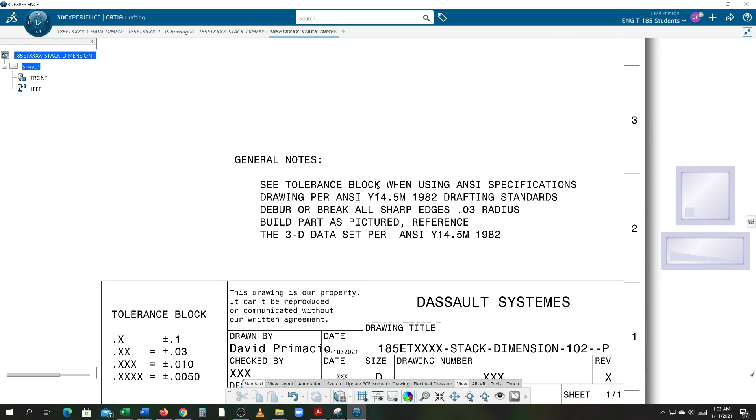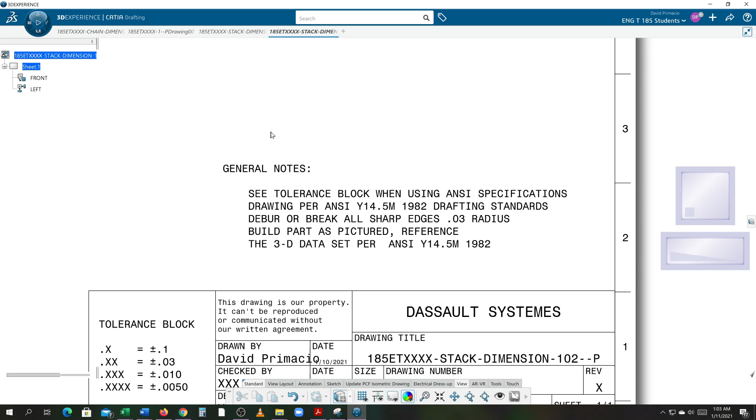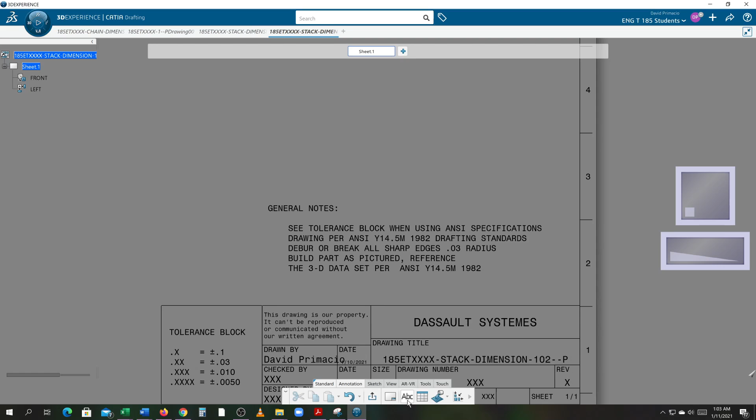I'm going to copy this general note in. And we've got to go back to the edit background. Go into annotation and select the text. Click a location and then paste that in there.

Whoa. That's weird. Let me see. Why did it do that? Now, for some reason, it gives me another line. I'll try and get rid of that line. Click. Dang it.

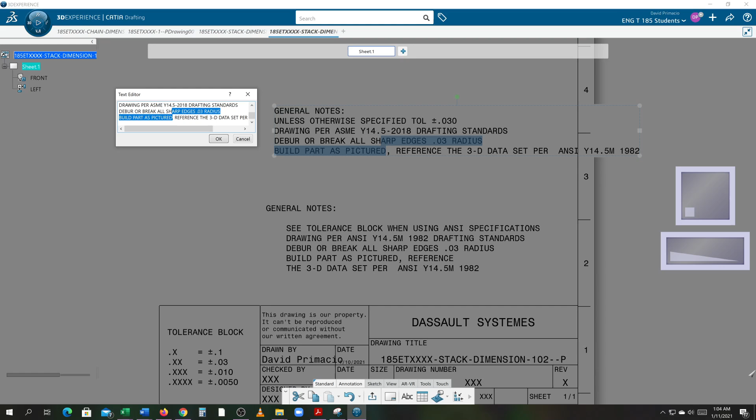I'm going to try. I'll move this box up because, again, I see it better here. I'm going to click on where it says D and hit Shift Enter. Select OK. Alright, so now I've got my general notes here.

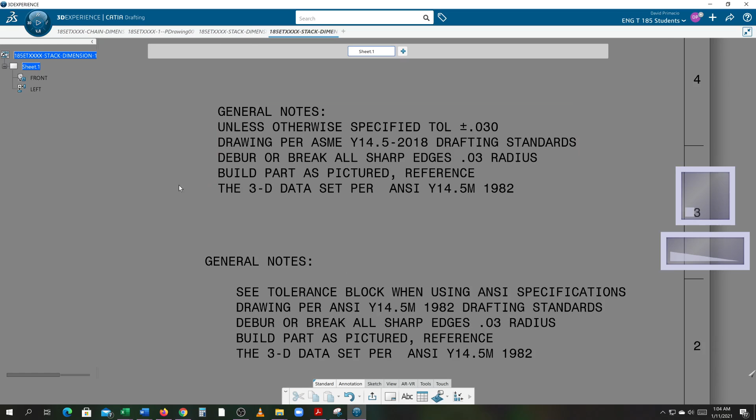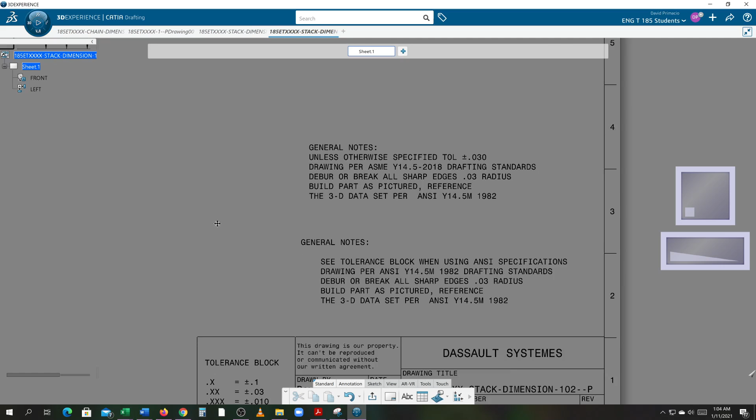You'll notice that, unless otherwise specified, tolerance is plus or minus .030. Well, with a lot, but not all, ASME drawings, they went to 4-place dimensioning. So, if I zoom over here, and we go back to the sheet background, and I click on these,

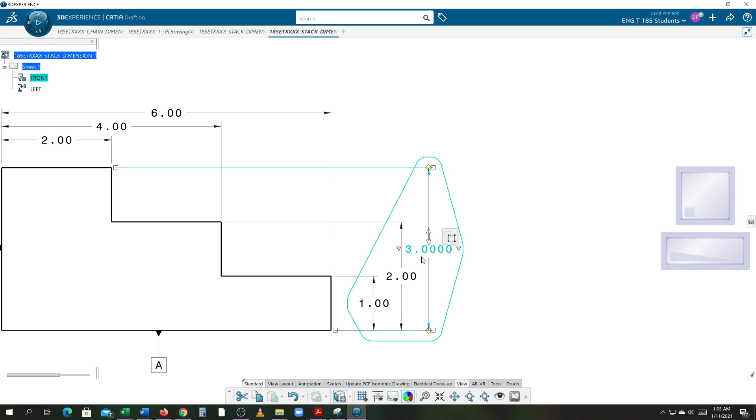click on this and let's see if I can do this. Let's highlight all of this, right click, properties, and I'm going to change the decimal factor to 4 places on all of those. When I hit apply and say OK,

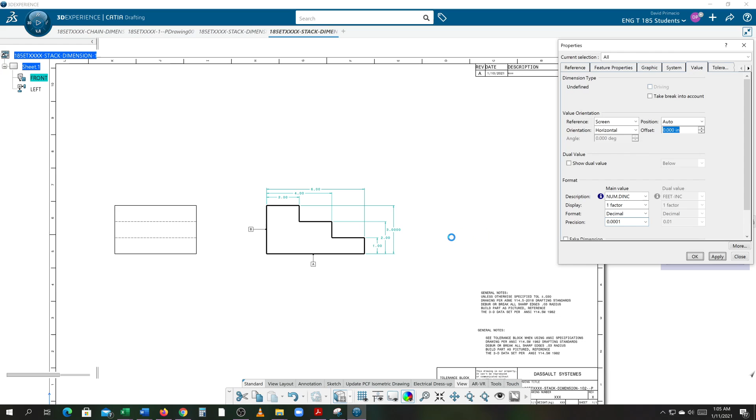one thing is when you're doing 4 places, you'll have to change the spacing of this. Again, you click on this, right click, properties. Because it went to 4 places, it got the system too tight. We'll have to do something like 9/16.

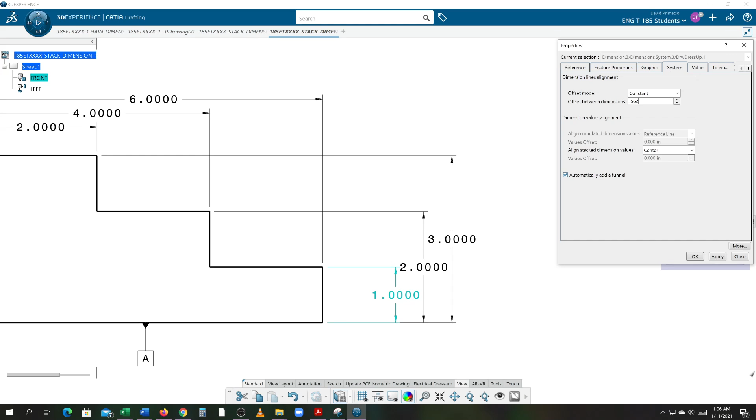No. 9/16, 10/16. We'll try 5/8 via 0.625. I'll do 5 divided by, no, won't do it in this one. 0.5625. Okay, give me a little more spacing here.

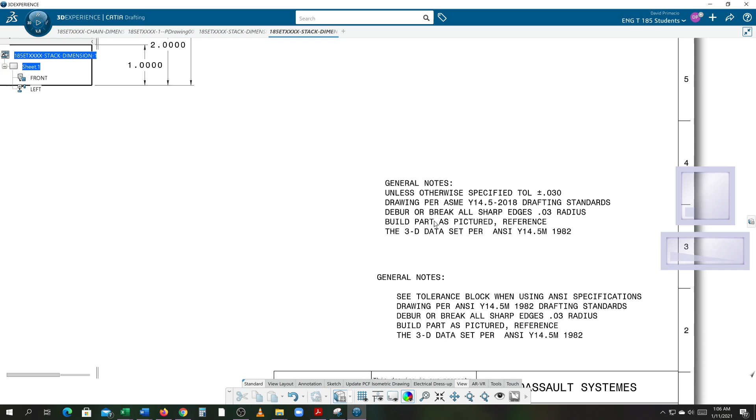So for the ASME specs, you notice it says plus or minus 30 thou. Over here, even though this is 4 places, when you call this off in the general note, we remove this

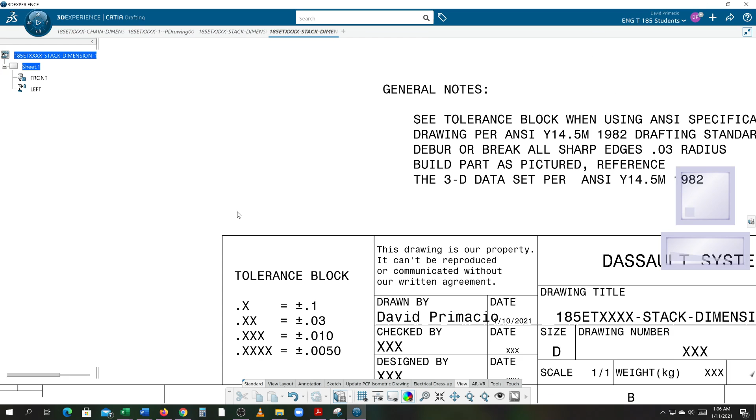from the tolerance block. If this tolerance block isn't removed, that means that all those dimensions have to hold to 0.005, 5 thousandths of an inch. Well, that is going to be one expensive part. So you don't want to do that. So you might wonder, well, why would you go 4 places?

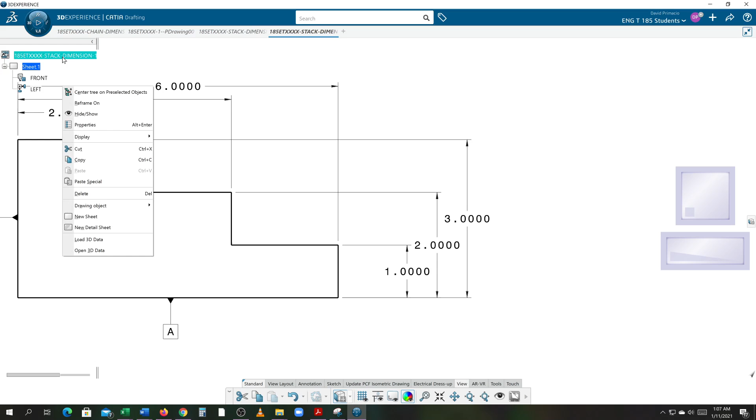Let's go to the sketch. The best way to do that is to right click on this and open the 3D data to make sure I'm going specifically to the correct part that was used for that drawing. I'm going to double click the sketch.

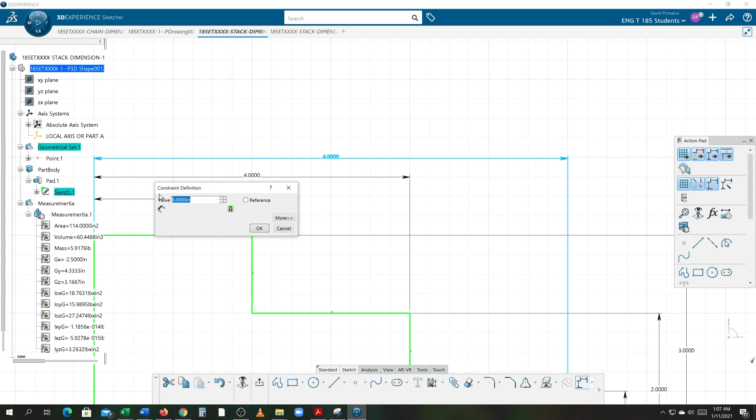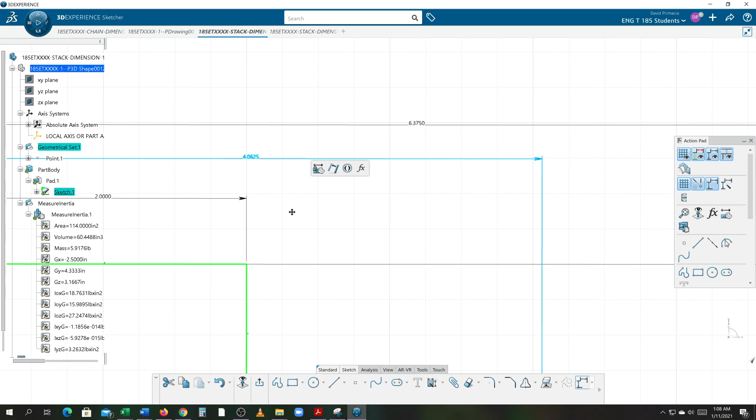Let's make this 6 plus 0.375. Let's make this 4 plus 1/16. Let's make this 2 plus 5/8.

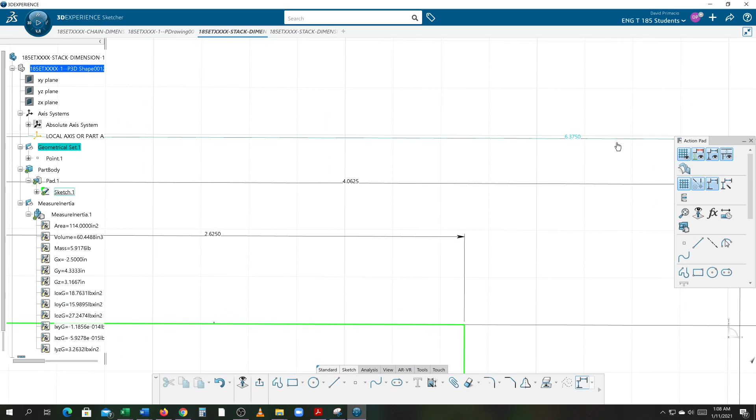Okay, so now that these dimensions are changed, we can exit out. The part is automatically updated to reflect that. Had I had my measurements showing, you would see these measurements. Whoops, measure item. The part has changed accordingly.

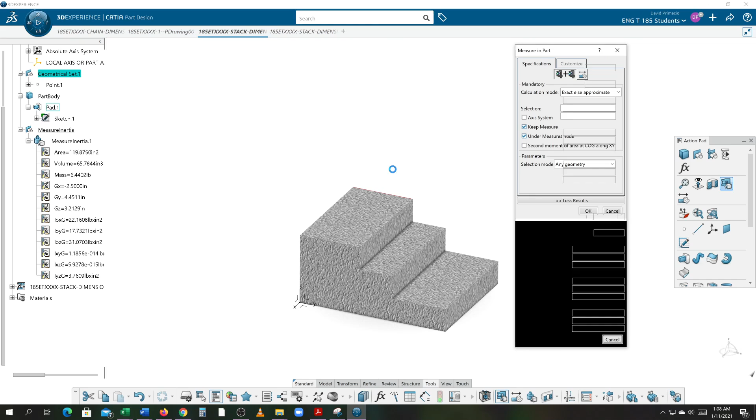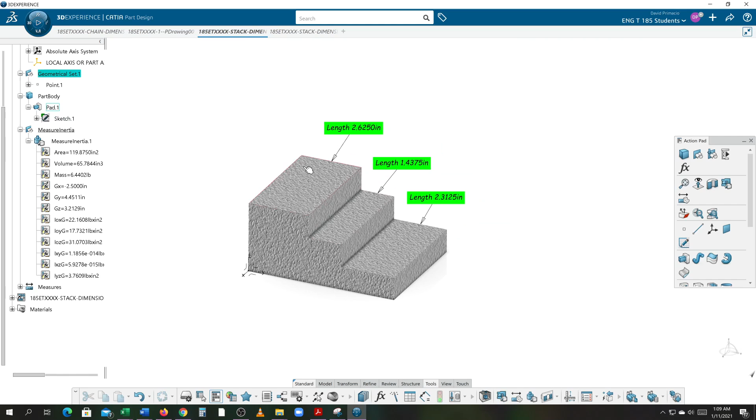Okay, so I'm going to get different lengths for these because of all the adjustments I made. All right, so that automatically was changed in the part. Now when I come to the drawing, I'm going to get an update feature. See all these little yellow marks in the specification tree on the top left corner? All those little yellow circles on there?

That's an update. You can hit this update down here in the feature on the bottom, or you can right click on the top collector and hit the update there in the contextual menu. Either way, you'll get the same results.

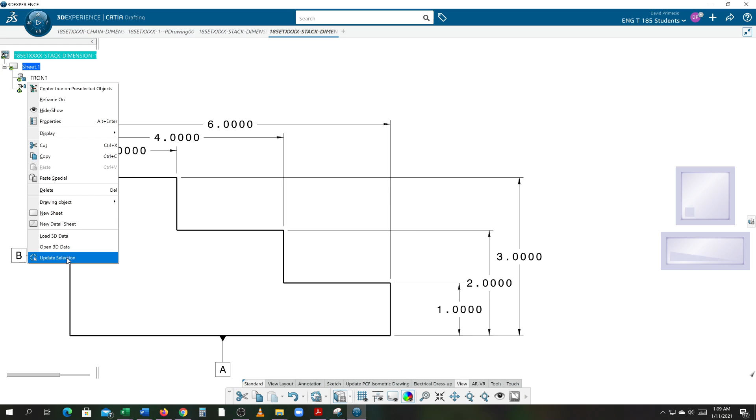When I hit update, you'll notice the dimensions will change to reflect the numbers that have been edited in the part. That's one of the beautiful things about CAD. It does take longer sometimes to make a part, but your ability to modify is so much easier than doing it on paper and pencil.

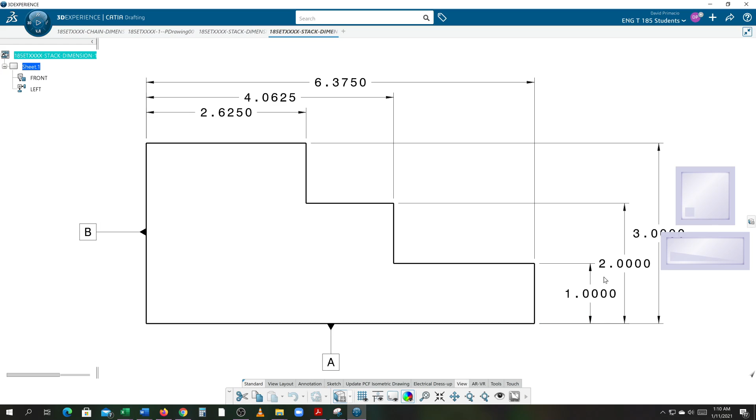All right, now the reason why a lot of the companies switch to going 4-place dimensioning and using this callout here is so there's no controversy on what size I really meant to go with. So if I change these back to 2-place constraints, go to right click and go to properties.

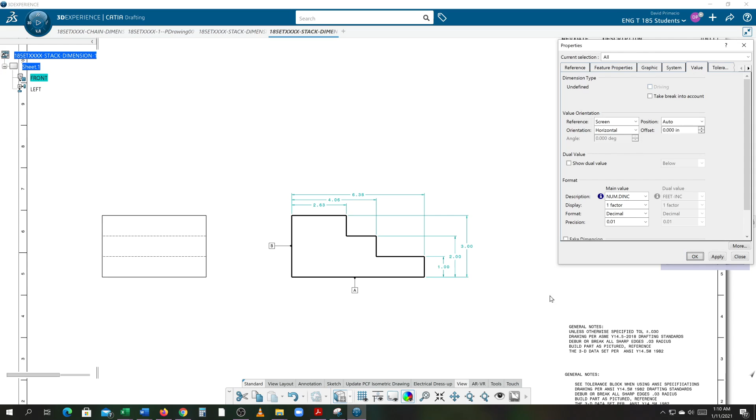If I go to value and put this back to 30 thou and hit apply, or 2-place precision and hit apply and say okay. Yeah, all these 1, 2, 3, that's all fine, but when you get over here, these numbers look odd.

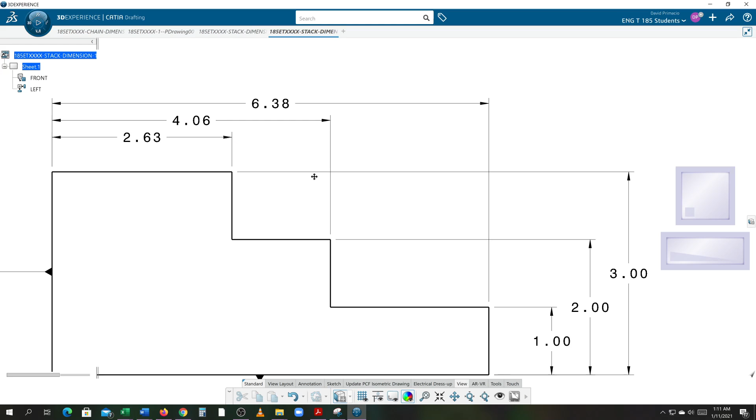And when I see these numbers, because I've been in production so long, I just know that these are 3/8, 1/16, 5/8, okay? Because I know what that would round up to. So this is rounding up, but in production, you want to know that these are actually going to fractions. Well, to remove that question as to whether or not it's 6.38 or is this 6.375, they decided to leave these all 4-place dimensions. So I just hit undo to put it back to 4-place dimensions.

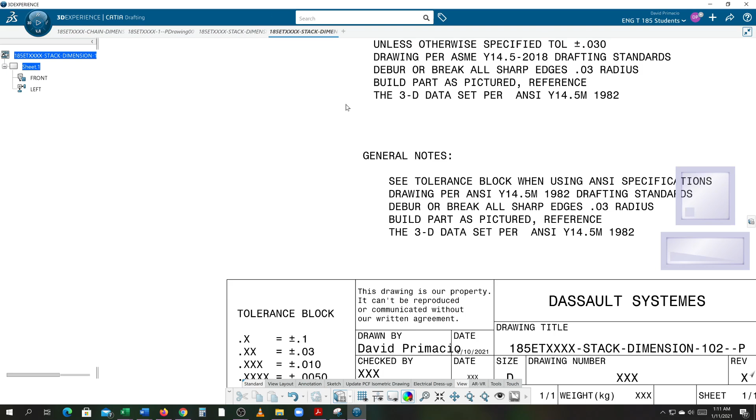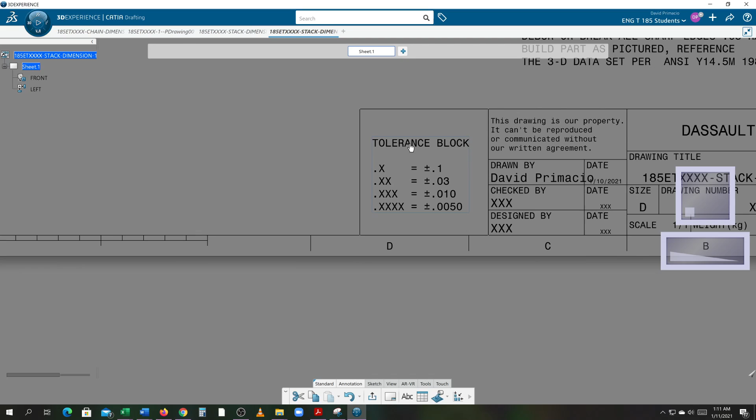This being 4-place dimensions, we don't want that tolerance. What we're saying is, unless otherwise specified, it's all going to be 30 thou tolerance. So we've got to get back into the background. All this hard work I did putting this in, I'm now going to delete it. And I'm just getting those lines, because remember it was a rectangle is what I did. I probably should have just created 2 lines, but I just created a rectangle real quick.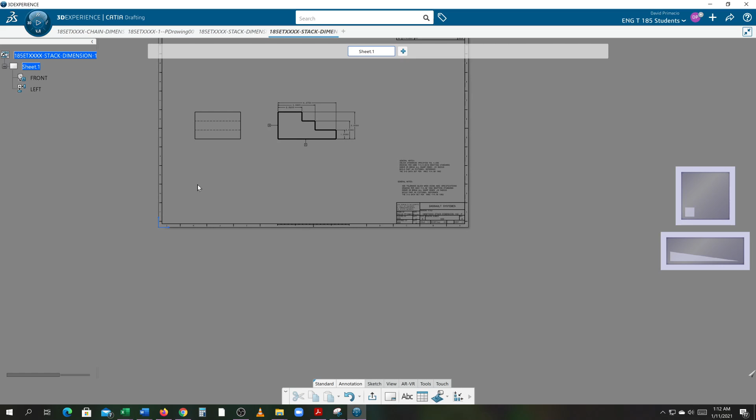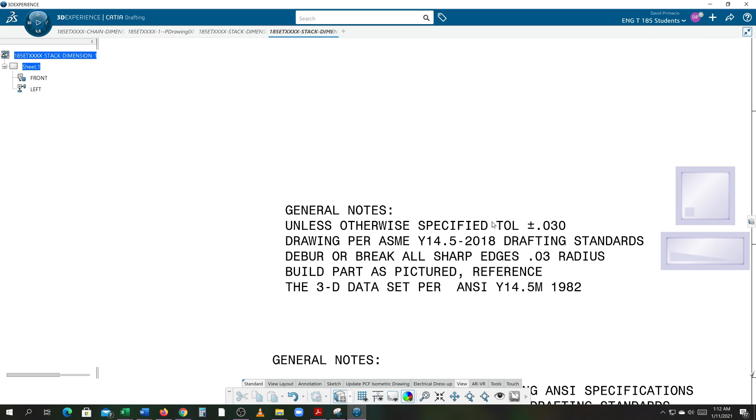Okay, we'll go edit sheet. Now, unless otherwise specified, I'm at 30 thou. Now maybe this dimension I need to hold the tighter tolerance. So what you would do is you would click on this, right click, and go to properties. I'm looking for a tab called tolerance.

And I'm going to pick, let's just pick the first one here. Wait a minute. Well, you know what you can do? You can always experiment with that. I'm going to go 0.010 and hit tab and change that lower value to 0.010 and hit tab and hit apply.

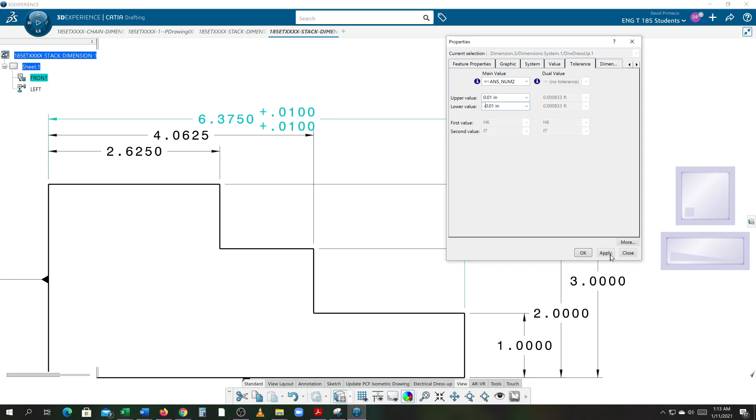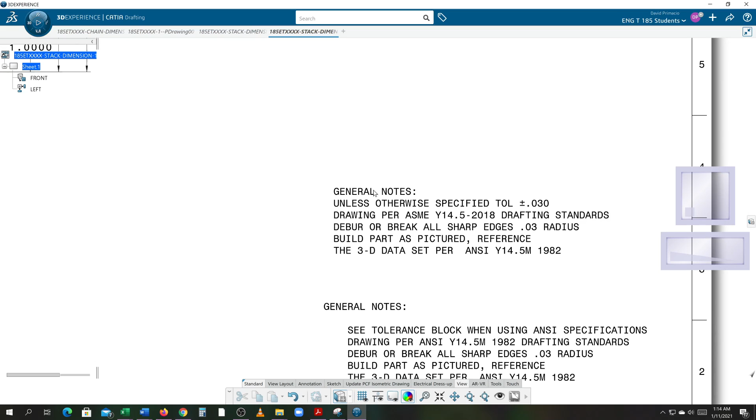Okay, so with this style of dimension, this is what you get. I want to hit a negative on the lower tolerance, hit apply. So if I do plus or minus and they're the same value, it'll automatically change it to this style here. So when I select OK, what we're saying here is all these dimensions are 30 thousandths except for where it's saying here, unless otherwise specified, I have specified a different tolerance on this one to be plus or minus 10 thou.

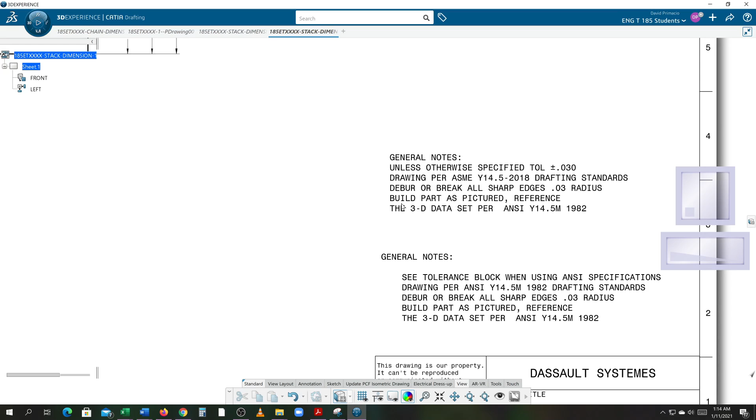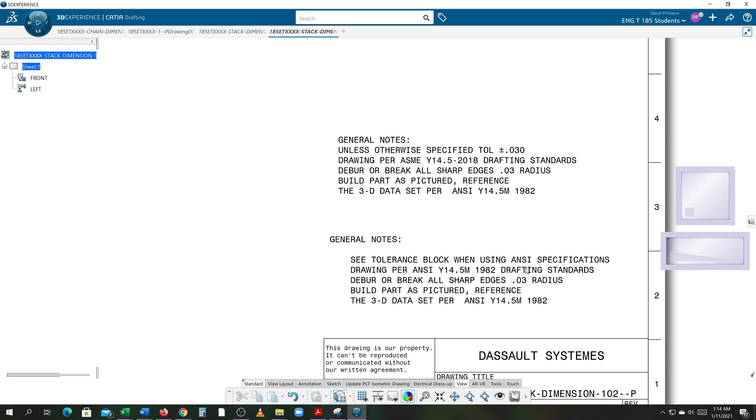Alright, so that's kind of the general difference. When you do the ANSI drawings here, we're going to go 2 place dimensions. If you see ASME call out, I'm going to do 4 place dimension. The ASME call out, we're going to say unless otherwise specified in the general note. See tolerance block: when using ANSI spec, we're going to create that tolerance block I just deleted. Alright, so that's the 2 different ways we're going to insert general notes.

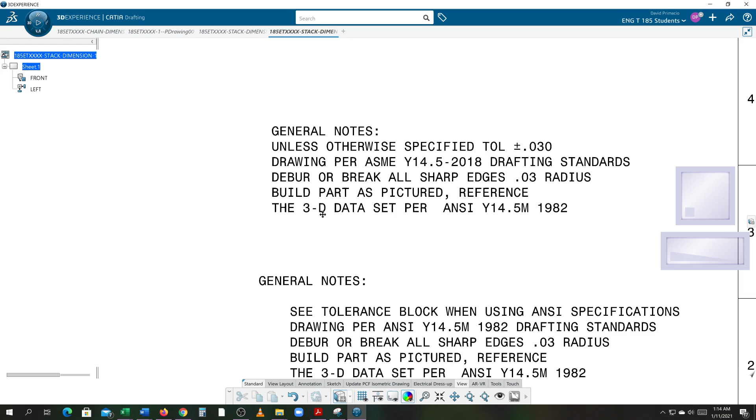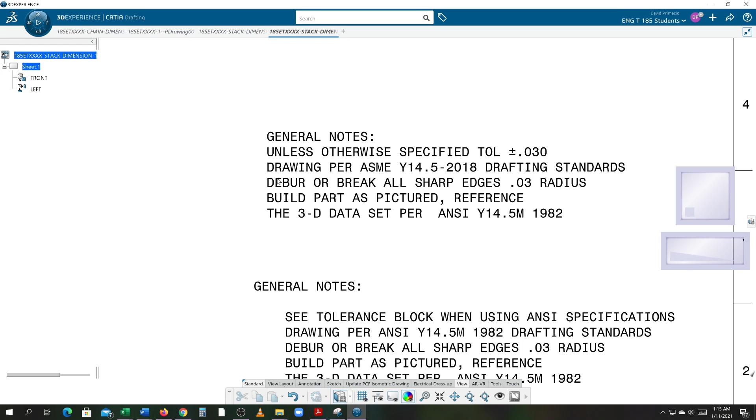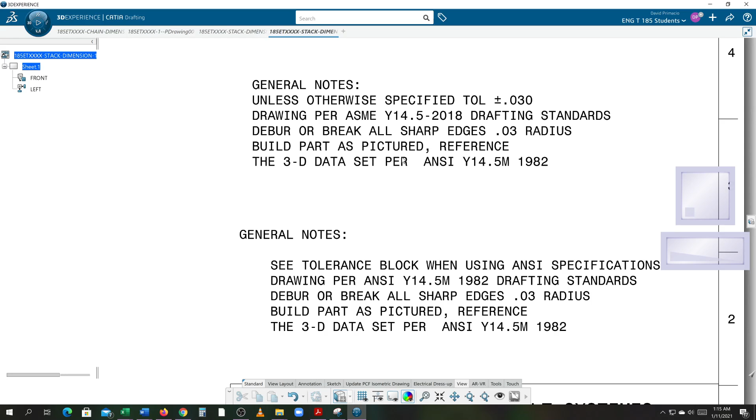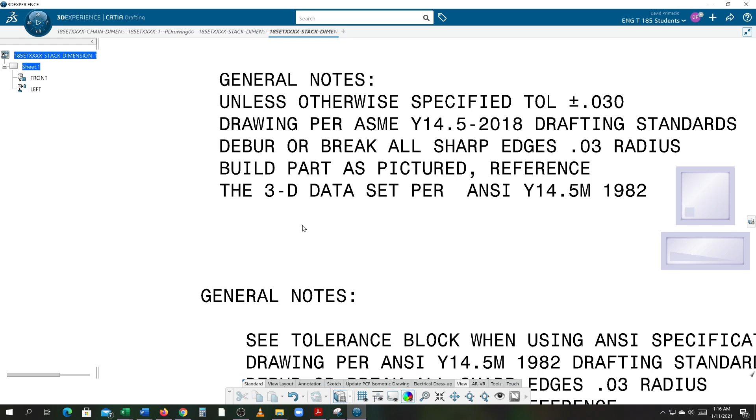Deburr and break all sharp edges was talked about in the previous video. Again, we're just breaking off all the sharp edges on the aluminum so you don't drag your finger across the sharp edge and cut yourself. Alright, and then we're building the part as pictured. That allows, if I made a mistake and didn't dimension something, or there are no dimensions at all on it, you're asking the shop to create their measurements for themselves, find it on the 3D dataset using the measure command. A lot of times these days we actually take the actual 3D model and then machine right to the 3D model. So if you're doing that, you can use this note here.

Alright, so just wanted to go over the 2 different types of notes. General notes for ANSI or ASME, the differences there.